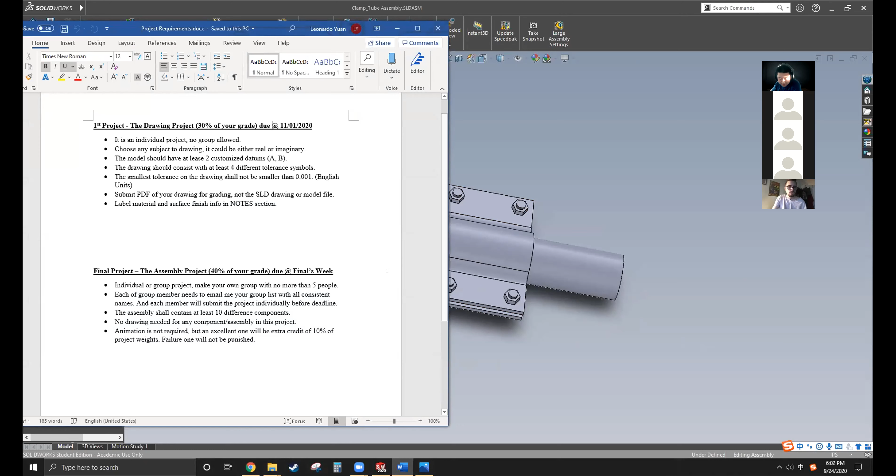So first of all, I want to talk about the projects, because we have 2 projects. The first one is a drawing project. You make a drawing of a part, save that drawing as a PDF and submit it to Blackboard. The second project is an assembly project, where you create a bunch of parts and assemble them into one assembly in SolidWorks and send me the assembly and the parts only. So no drawing is created in the second project.

The first project will be due November 1st. Is this due date okay with you guys? You have more than a month to complete it. Sounds good. Okay, because the first project should be a very easy one, because you just need to create one part, pick whatever part you like, but it has to be an actual part.

And I'm going to go over some advanced drawing techniques, for example customized datums and tolerance symbols, probably next week or the next 2 weeks. I'll make sure you know everything about how to make a drawing similar to industrial level, and I will let you know my expectations. Here is some briefing about the requirements. I'm going to post this in Blackboard after I read it to you and get your feedback, because I already asked Tuesday and Wednesday's class. If no modification is needed, I'll upload this right after class to Blackboard so everybody can see it in the course documents.

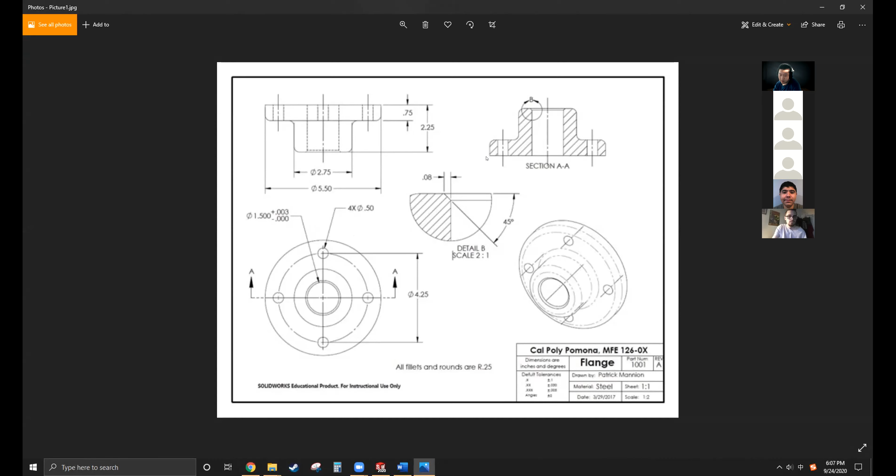Also, this drawing should have 4 different tolerance symbols, and we're gonna go over tolerance symbols next week or in 2 weeks as well. And I mean 4 different ones.

So pay attention. Somebody asked if they can choose a very simple part, a very simple configuration. It can be simple, for example a square, like a Rubik's cube or something, but that won't have enough detail to support 4 different tolerance symbols. Because a part must be complicated enough to support 4 different tolerance symbols. So this is gonna be a challenging one, and this is something I'm gonna pay attention to during grading.

And the smallest tolerance on the drawing is 1/1000th of an inch. Don't make it smaller than 1/1000, because this is, I'll say, industrial standard - we're not that precise, so 1/1000 is good enough. Don't make it 0.00005 or something like that.

All right, and English unit. So make sure I'm talking about inch as the English unit, because the standard for millimeter is 4 decimal places - that's 0.0001. All right, and the PDF.

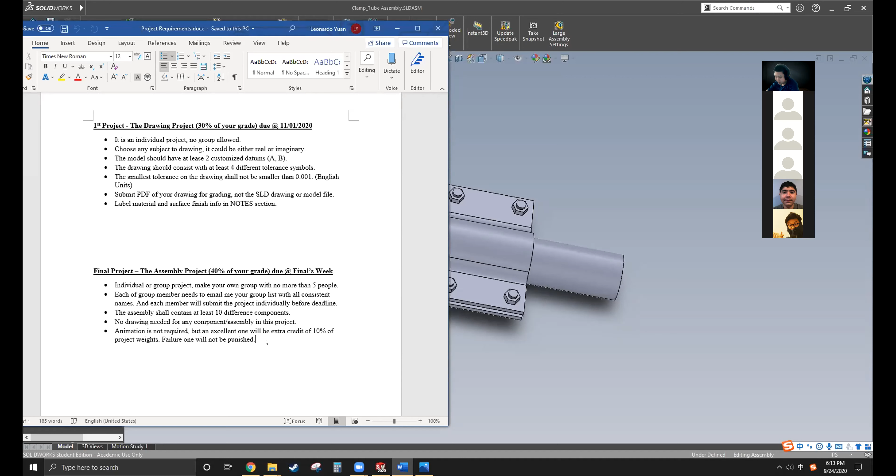For the rest of you who want the freedom to create something you like, you can do that, but you need to tell me by email what kind of stuff you're trying to make, and I'll say it's okay or not. I just need to know what you're making because I don't want something completely inappropriate. It can be an individual or group project, up to you, but I'm not here to make the groups.

Robotic arm, yes, I do allow that. If you can make, for example, a 6 degree of freedom robotic arm, that's great, because I made one myself a few years back when I was in school. So that's one idea that's approved. If you want to commit to it, go ahead.

For the assembly, can we make a movie like in the presentation? Yeah, I'm going to talk about that later. So group or individual, but I'm not going to help you make groups. It's up to you.

You've got friends, you can group up, but everybody in every group needs to send me an email containing the entire group name list, so I know each member acknowledges each other. I don't want somebody claiming to be in your group when nobody even knows that guy exists. I don't want any misunderstanding, so if you group up, everybody in your group sends me the name list, and it must be consistent.

Each group member - oh yeah, I just went through this. The assembly shall contain at least 10 different components. Everybody pay attention on this, this is probably the only very strict requirement for this project.

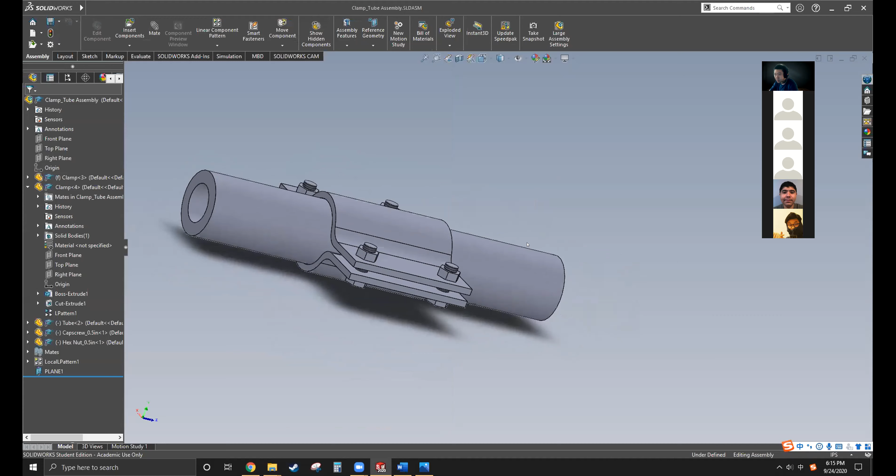Let's look at SolidWorks. This is a very simple assembly I made, 2 clamps clamping a tube. It's definitely going to be part of some huge assembly or something, but I just made this to show you guys an introduction to how to make an assembly.

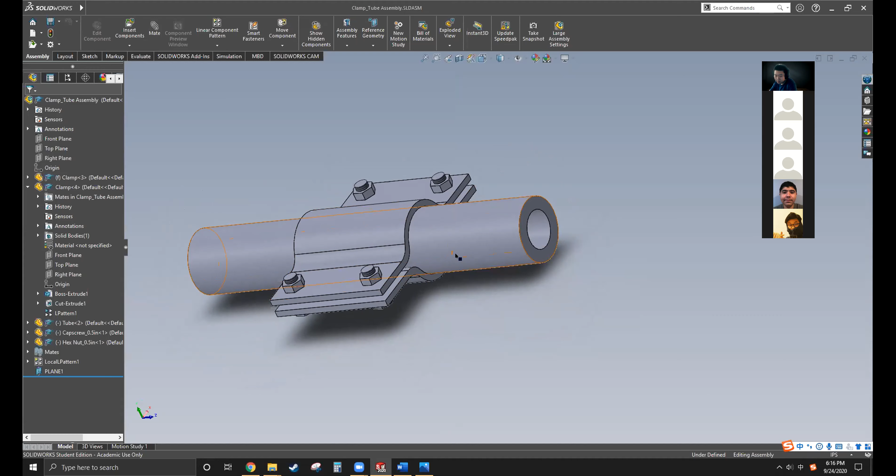So in this assembly, question 1: how many different components do you guys think this has? Type in chat, give me a number. Including the bolts and screws? Yeah, everything. Come on, give me a number. I see correct answers, and I see a lot of wrong answers.

Sorry, I asked this in a confusing way because I want the answer to clarify my requirement. The correct answer is 4, because I asked how many different components this assembly has. This assembly has 4 because the 2 clamps are duplicates, and the boltings are duplicates as well. The tube counts as 1. So: tube, clamp, hex nut, and cap screw - total 4 different components.

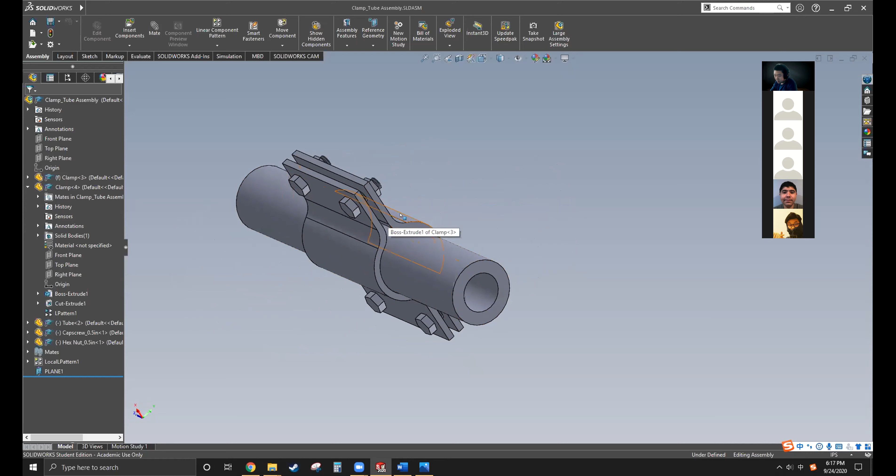Exactly, duplicates don't count as different components. The reason I'm saying that is when you're making a bill of materials or sub-assembly bill of materials for this assembly, you will only have 4 rows: 1 row for the tube, 1 row for the clamp, 1 row for the cap screw, and 1 row for the hex nut.

But the next question is, how many parts does this assembly have? Bingo, you got it, 11 parts. The fasteners are 8, and 2 clamps make it 10, and 1 more makes it 11. Why 15 though? The clamp is actually 1 piece.

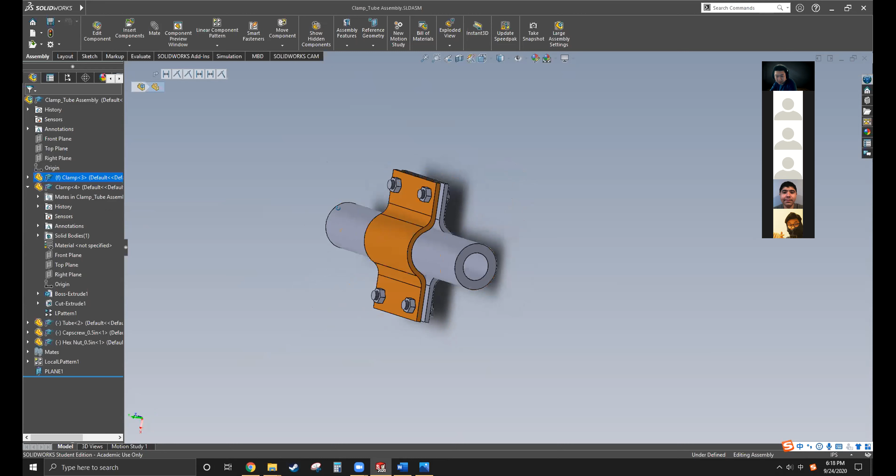Maybe you're confused with the clamp, which is one piece, and the tube is one piece as well. So 11 parts total, because the total quantity of parts is 11, but only 4 different components.

So let's get back to this list. I want your assembly to contain at least 10 different components. If you're not doing the engine assembly, this is something you need to watch. 10 different components, and fasteners don't count.

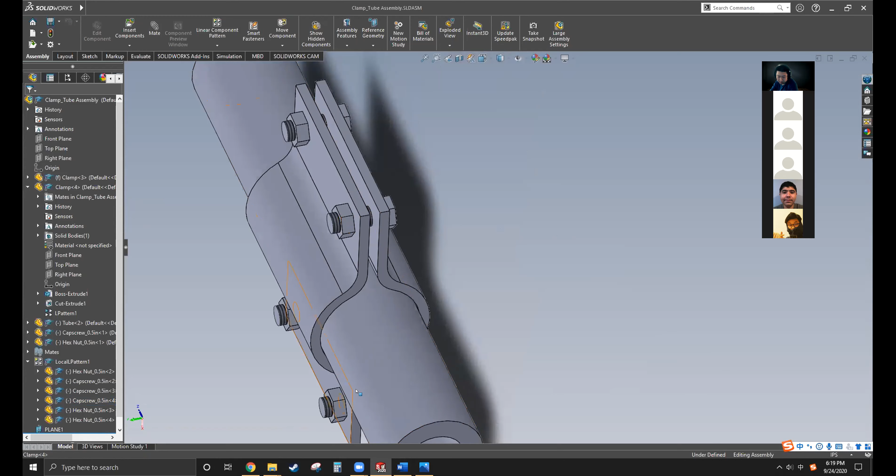So fasteners, like for example cap screws, no matter what size, only count as one. I understand some assemblies require different sizes or lengths of fasteners, but cap screws just count as one, and nuts count as one. So be careful when identifying your 10 different components.

And no drawing needed, so don't create drawings. Everything remains in the modeling section and assembly section. Don't create drawings.

For submission, save all the parts and assembly into a folder, zip that folder, and submit it to Blackboard. If Blackboard can take it, we'll do some experiments to see if it can take the entire folder and if I can successfully unzip it. If not, I'll give you guys an email address and you can email it to me.

Animation is not required, but if you can make a successful animation, I'll give you extra credit. If your animation doesn't work, I'll just ignore it, it won't hurt you. So any questions?

Oh, and it's due finals week. So when you're having your finals, it's going to be due that Friday.

Hello? Sounds good. Okay, no concern at all? No, makes sense, okay, that's good. Yeah, you guys are really good. All right, then I will save this and post it into Blackboard after the lecture.

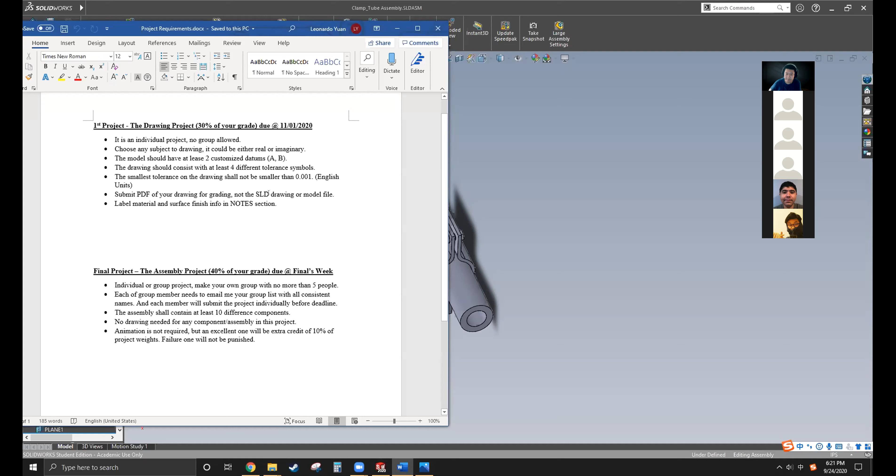Anything else? I believe you guys have all seen this. This is what I downloaded from the PowerPoint. You want to use this as a reference for basic drawing, go ahead. But the detail of this one is far from enough for project one, so just remember that. The title blocks are good though.

Okay, let's get into today's topic. So today is actually the third time we're meeting for SolidWorks, right? The first time I showed you guys how to model easy things. Second time I showed you guys how to draw easy things. And today we're going to assemble easy things.

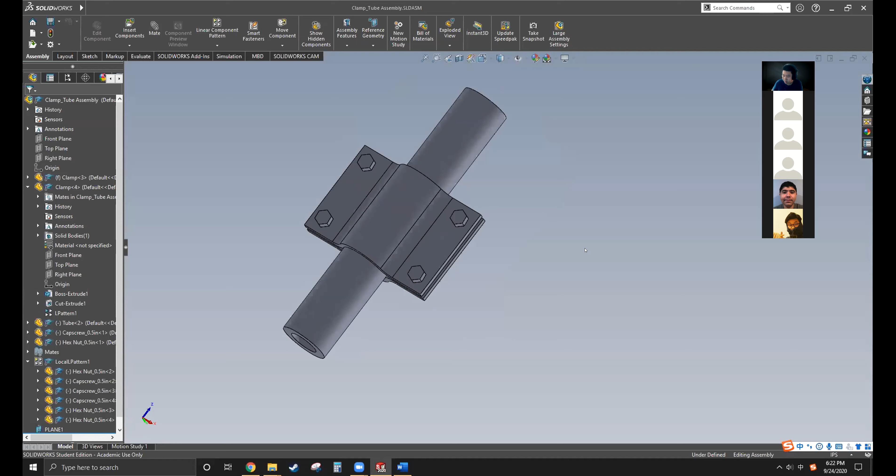So today I'm going to show you guys how to make this assembly. Is this assembly at least familiar to you? So at least you know what this assembly is. Any question about this assembly, or anybody doesn't even know what it is?

Is this going to be on the test? No, no, I just want, for example when I'm talking about the clamp, I want you guys to know what I'm talking about. Yeah, yeah, so.

Okay, let's start. No? So this class won't have any exam.

We only have quizzes, and 4 quizzes are only 10% of your grade. The first quiz is probably going to be next week. I'm still thinking about what to put on the quiz, because I feel like SolidWorks is, we don't have a textbook to base it on, and there's pretty much no concept. It's just like, I show you guys how to do this, and I don't know how to actually quiz it. So I'm still thinking about it.

Maybe I'll just merge the quiz into assignments. So give me a week, and I'll let you guys know next week. Either you guys are going to have the first quiz, or I cancel the quiz section completely and make the assignments 30% of your grade. Because I'm thinking about multiple choice questions, and all my potential questions feel so dumb.

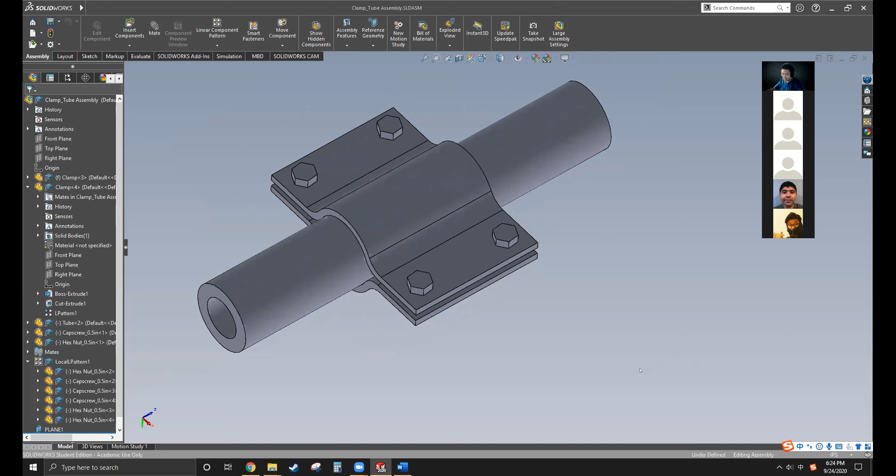All right, so let's get into this, and I hope we can finish quick. Before you make an assembly, definitely you're going to have a lot of parts, right? So part, assembly, drawing - assembly is when you have all the parts ready and you try to assemble them together. So let's start making the part.

Oh wow, my computer is lagging. What the hell?

Alrighty, so in order to design the clamp,

Yeah, it does. That's why I'm thinking about upgrading my computer to 32 gig. Just lazy to do it.

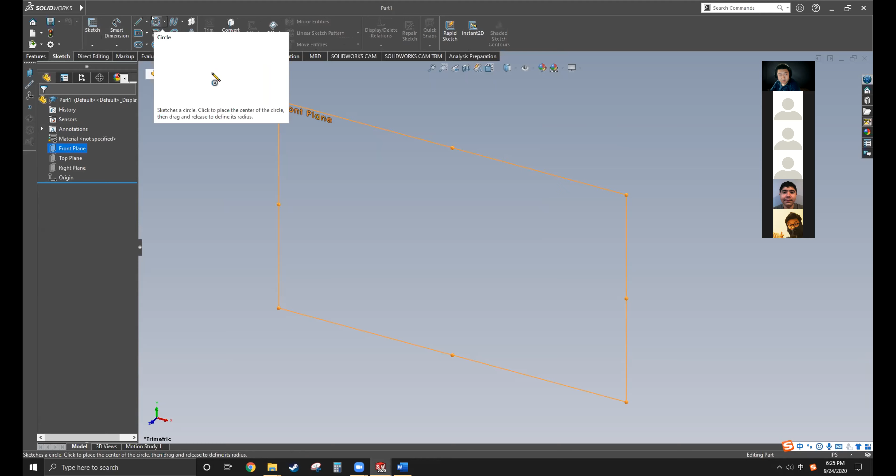So at the very beginning, let's make that clamp. In order to make the clamp, you need to know how a clamp works, right? A clamp has two pieces to hold a tube or hold a pipe. So let's start by drawing center lines, because it's a symmetric part. A clamp is a symmetric shape; the left side is the same as the right side. So let's make a cross first, and let's make a circle.

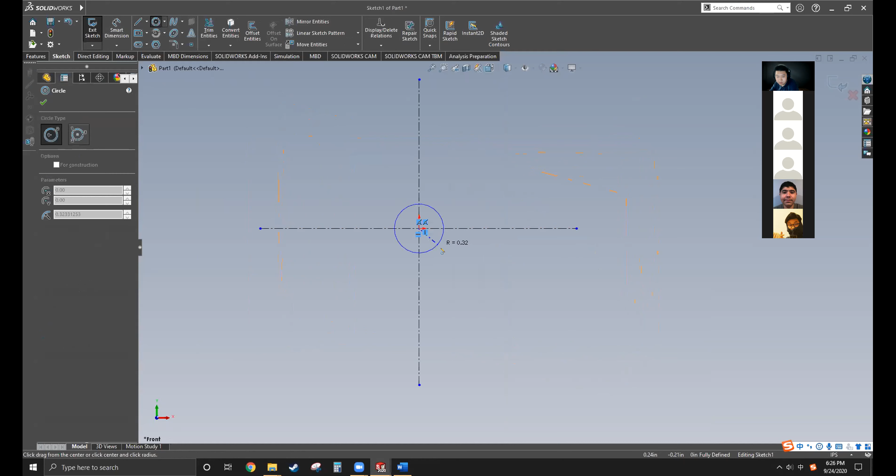This circle represents the outer diameter of the tube. The radius, let's do 1.25, so we have a diameter of 2.5. So we dimension it, 2.5 diameter. Everybody good with this? This is going to be the outside diameter of the tube that the clamp is holding. So the clamp's inside diameter should be equal to or larger than this 2.5. If it's smaller, then it can't fit, right?

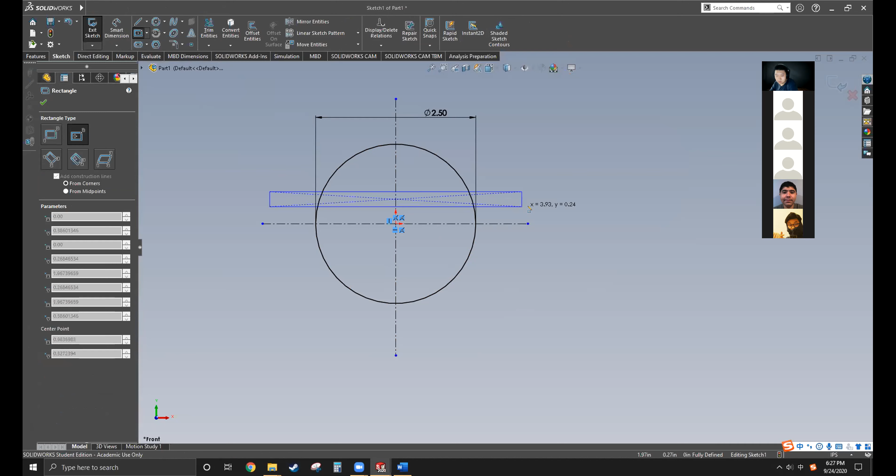So we have the outer diameter of the tube, and now let's make the body of the clamp. The clamp works in pairs. One clamp can't work. We're going to have two clamps, and the two clamps should have some space in between, because if the two clamps are touching each other, this surface and this surface, there is a chance the tube or piping will slip. We want to apply the maximum friction we can get from the compression of the bolting. So when you're creating the body, you need to take that into consideration. The body, like the wings of the clamp, should have some distance from the center line.

If I draw the other side, the two clamp bodies should be somehow like this. The top rectangle is going to be the first clamp body, and the second rectangle should be the bottom clamp body. But we only need to draw one clamp because we can use it in duplicates, right? So let's get rid of the second rectangle. This is going to be your clamp body, and let's put dimensions on it.

First, how thick do you want your clamp body to be? I'll say 1/2 inch. And what is the total length of the clamp? Let's do 7. And how far apart do you want the two clamps to be? It seems like a quarter should be fine.

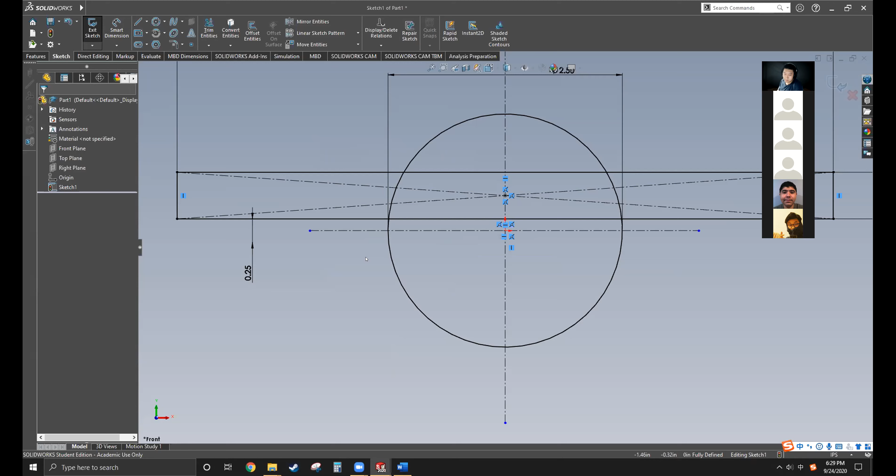These numbers are totally made up. Whether this clamp fails must be known through stress analysis by FEA or some other method. In this design, it's kind of like trial and error. Basically, you're designing based on your experience or somebody else's experience. These numbers are made up and don't guarantee this clamp works, so pay attention to that. Don't say, okay, I got these numbers by calculation. No, I didn't. It just looked okay to me. If you want to test the reliability of this clamp, you need to FEA it.

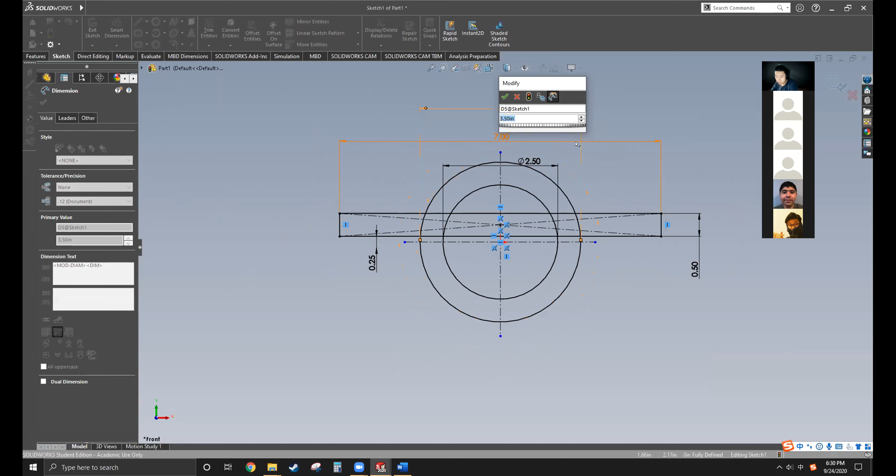So let's do another circle because the clamp needs an outside diameter as well. This arc is going to be the inside diameter of the clamp, which is holding the tube. And this one also needs a thickness, so let's keep the thickness consistent at 0.5. So 2.5 as the inner diameter and 0.5 as the thickness gives us 3.5 as the outside diameter. So 3.5 as diameter.

So you can see right here, the clamp shape is here, like the half moon or omega shape. It starts from here, the arc, and it ends here. Now let's get rid of the lines that are irrelevant. So trim, and there's a power trim, and just drag it to get rid of the lines.

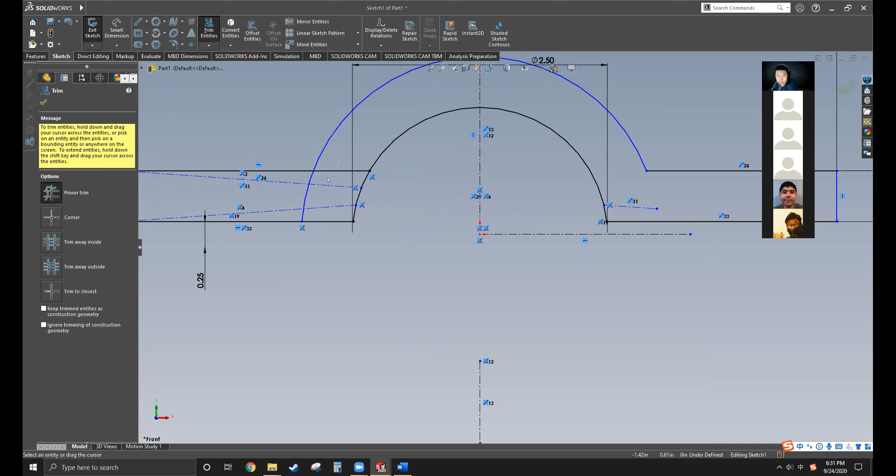Alrighty, so now it looks like a clamp, right? Fairly similar. Now let's make some minor modifications. We need to get rid of the sharp edge and make the tension transition a little bit smoother. So sketch fillet, in sketching right here. You can have a fillet in the sketch section, not the feature one. The features also have a fillet, but not that one. The one in sketch is called sketch fillet.

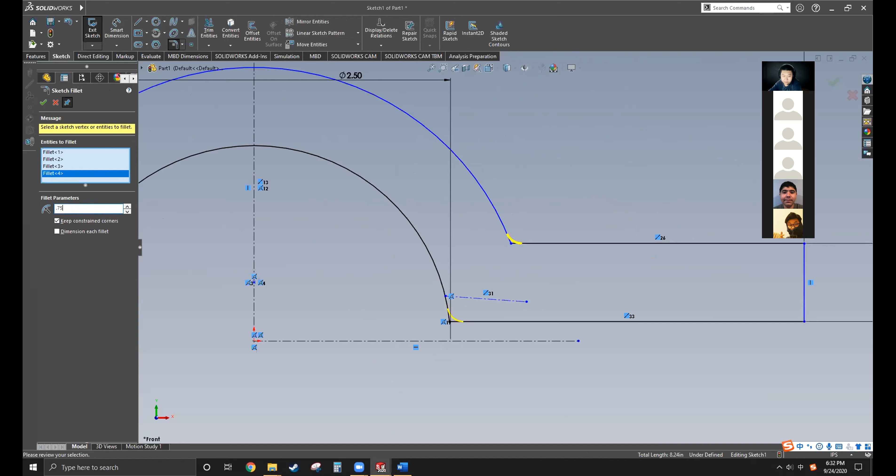So you just click the first line and click the second line, and there's going to be a fillet in between. Let's set the magnitude as 0.75, and look at the preview for how smooth it should be. It looks pretty good. Or you can change it to 0.5; it's smaller, but it also looks good. Let's keep it 0.75. You see it's way smoother. And the trim is in the sketch section right here, called trim entities.

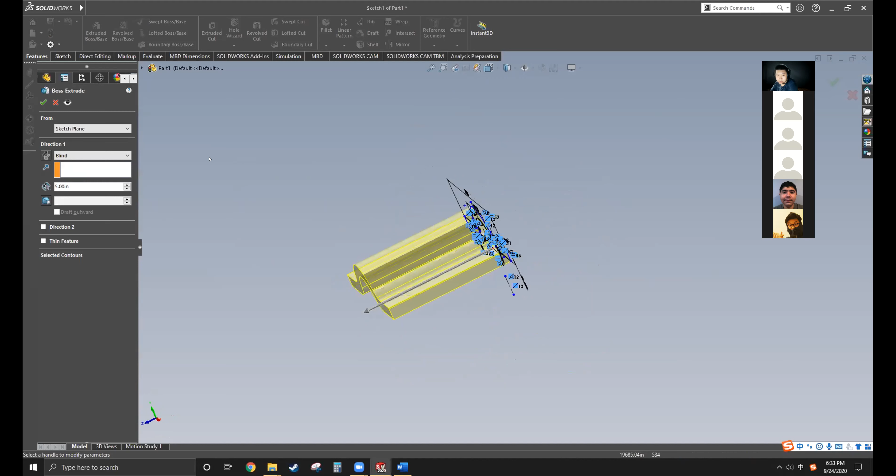All right, so once you complete it, you can go to feature and extrude it. Let's make the total length as 5. So the front preview, you'll have a total length as 5 and a total width of 7. Okay. You click OK, and the clamp body is made. And what's missing now is holes, right?

So you can go here, insert. Professor? Uh-huh. Was the extrude 7 or 5 inches? Wait, is the what? Sorry, I didn't catch how many inches you extruded the sketch. 5, but it doesn't matter. You can just pick arbitrary ones because I did arbitrary. Okay. These numbers are all I made up. I didn't use any reference.

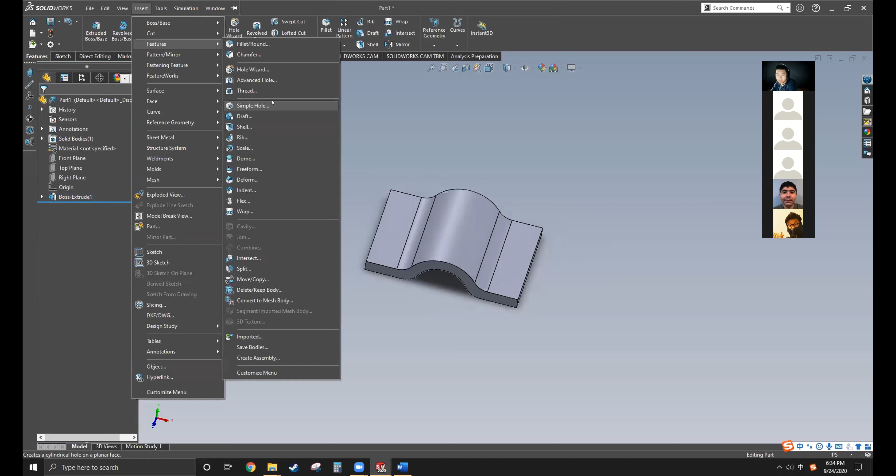So you can go insert, feature, there's simple hole. There are a whole bunch of other holes, but in this class, the simple hole should be fine. Let's stick with simple hole today, or you can search here. Let's say hole, and you'll see a whole bunch of holes right here. Let's do simple hole, and it asks you to select a surface where you want to place this hole. So definitely this one. And look, it has one direction. Blind, through, next surface, or other stuff.

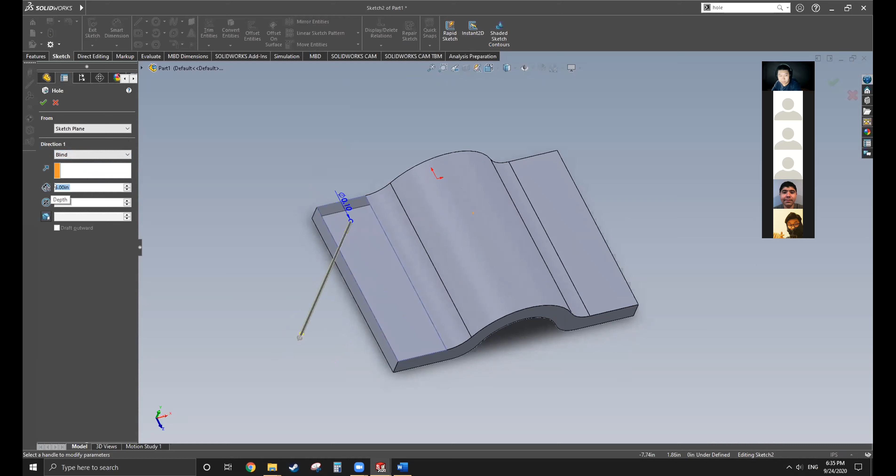We can do next surface and select a surface, or we can do through, because we're gonna do a through hole, right? And this one is asking what is the hole diameter. If you're selecting blind, they're gonna ask for how deep this hole should be. So let's do through so we don't have to punch in another parameter. The hole diameter, 0.5 should do the job, and it's not gonna leave too little material to the edge. So that worked for me.

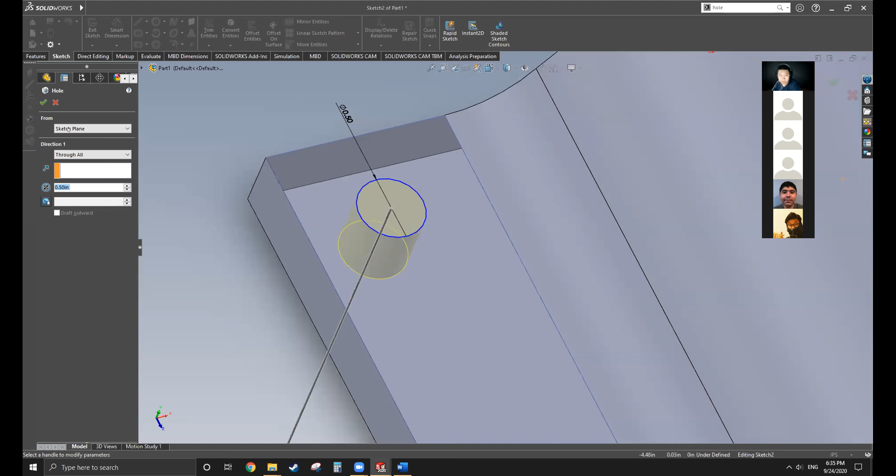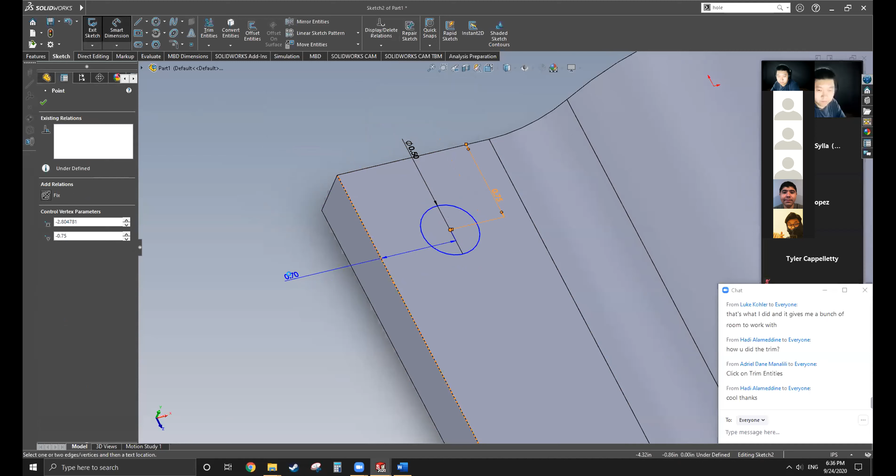So one hole is made, but this hole's location is random because we just clicked some random place. So you must go under the hole. There's a sketch, and you need to edit the sketch. Going to sketch, there's smart dimension, so you can identify the location of this hole from the origin to the edge, or if you have other reference. Oh, okay, sorry. I need to do this first. Let's do 3/4. And 3/4 as well. So now you can see this hole goes from blue lines to black lines. That means this hole's location is defined.

Exit the sketch, and now you see this hole is at one of the corners. And how to make the rest of 3, you can go exactly through what we just did and make 4 different hole features, or you can go linear pattern. If you do pattern here, you see you have a bunch of different patterns. Here's the thing. You can do the negative extrusion and make a hole, but the feature you're gonna have is an extrusion cut. So it's not gonna be a hole. That's why there are so many different hole features right here: simple hole, hole wizard, advanced hole, and so on, because of the callouts.

For some models, for example, some very precise assembly, they want to call out the hole and have the model consistent with the hole you just created. That's why you need to use these features. For this class, we're trying to keep things simple. That's why we use simple hole. In this class, if you want to use extrusion cut to represent a hole, go ahead, because we're not going to machine anything. But later on, you'll find out sometimes you only have the choice to use certain hole features, because when you're making the drawing, you won't have very exact and precise callouts.

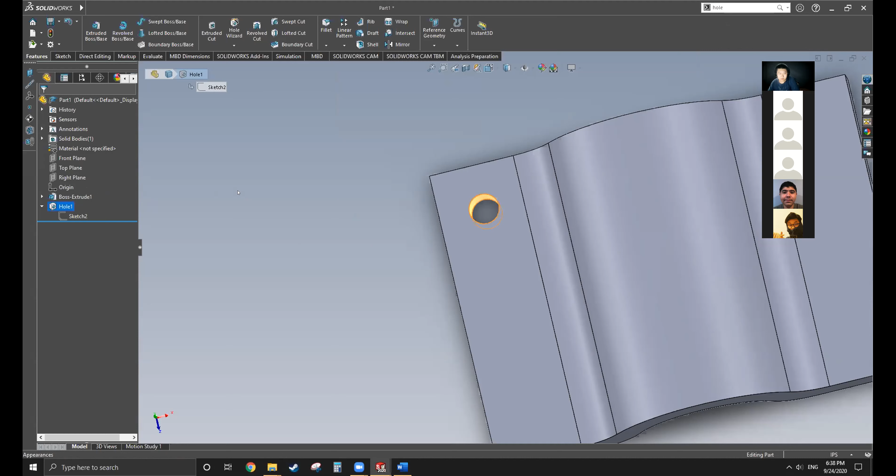Okay, so let's do linear pattern, because it goes linearly, right? We want 1, 2, 3, 4 holes. Click linear pattern, we already selected hole 1. So this box shows hole 1 here. If you didn't select any feature, you need to manually select the hole in here. First it asks for direction 1. We want this hole to have another sibling at this side of the wing, right? So let's choose this edge, because this edge goes from left to right, kind of like west to east. That's our first direction, and you will see a little arrow pointing rightward. That's the correct direction we desired.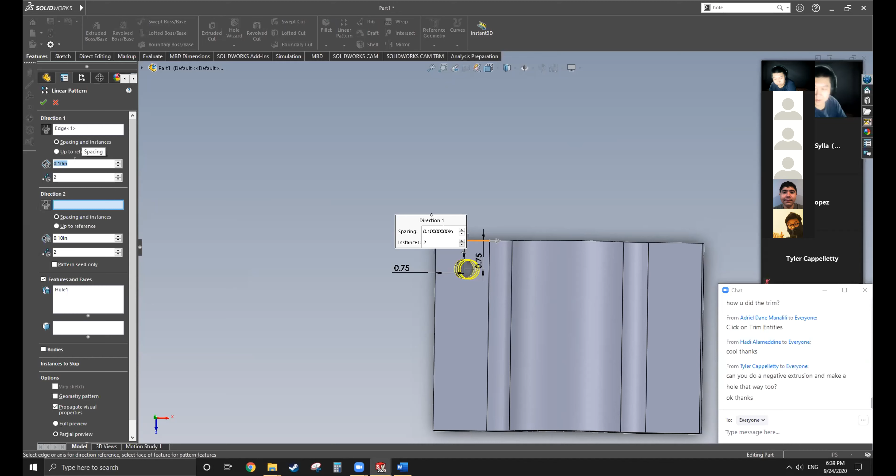And this is distance, like spacing, how much apart you want this hole to be. The total length, if you don't remember, you can measure it from the Evaluate tab. There's a measure, so measure this edge to this edge. It will tell you distance is 7. So 7 minus 0.75 and minus another 0.75, because we want this hole to be the exact distance from the edge, same as this one. So 7 minus 3/4 minus another 3/4, that's 5.5, right? And you can see the preview lands exactly where we want.

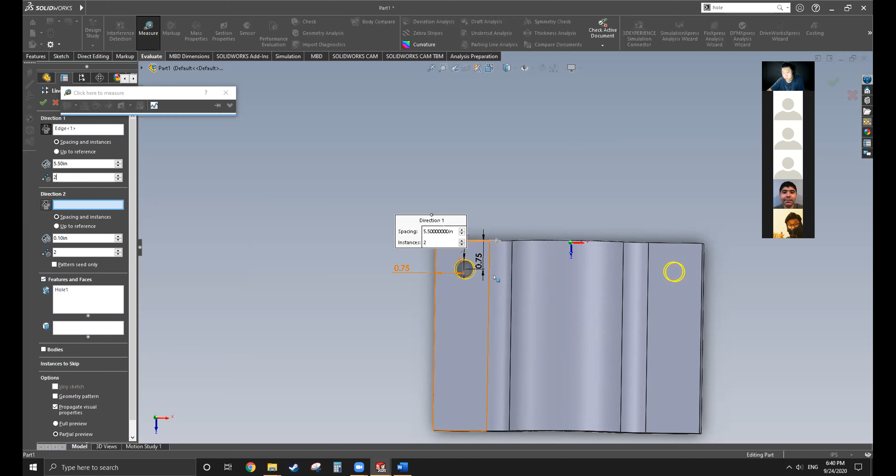So number of instances, that means how many holes you want to create in total. In total, we want 2 holes, that's why it's 2. And this one can be 1, because if you choose 1, there's not going to be any creation here. Your original hole is counted as 1.

So direction 2, we want it to be downward, north-south, right? So choose this edge and look at this arrow here. It's pointing upward. That's not good. We want this hole to be downward, right? This little arrow here. So here is reverse direction, and it's pointing downward now. You reverse it back, it's upward, and click one more time, it's downward again.

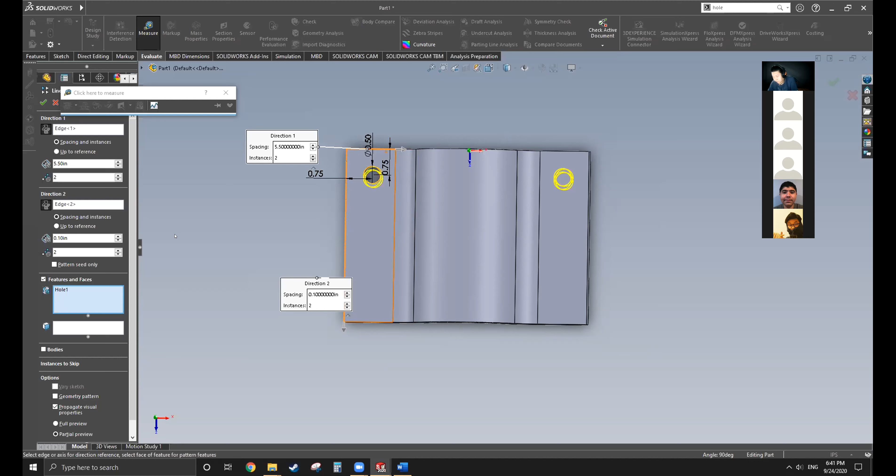So how much spacing? I remember the total length of this clamp is 5, right? So 5 minus 3/4 minus another 3/4, because the origin to the edge is 3/4, right? So 5 minus 3/4 minus another 3/4, that's 3.5. And number of instances, 2. And it also creates one right here because this and this are linked together. So this one is automatically created. So look at the preview, everything's good.

And if you're interested, you can play around with some options right here. And now we complete. All right, so you click on this pattern, you see 1 pink, 3 yellow. The 3 yellow are the generated features, and the pink is the original feature.

Give me 1 second, let me turn on a light.

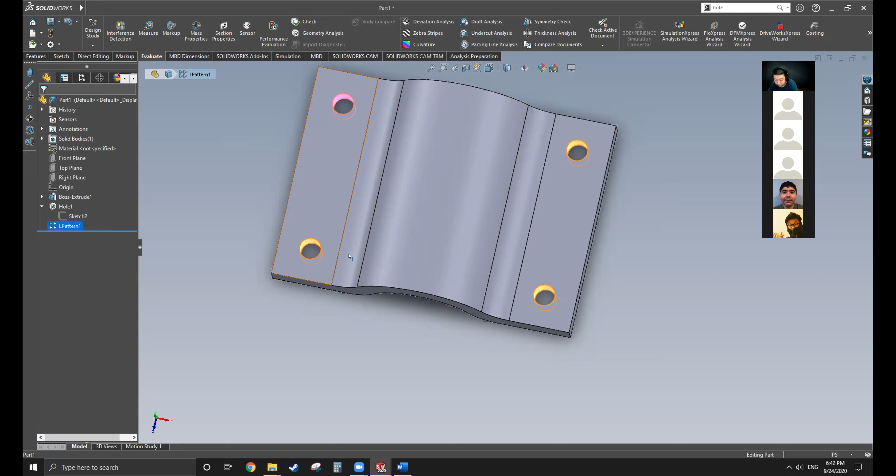Okay, any questions? Because the clamp is completely made at this point, so this part is complete. All right, no questions? I'm gonna move forward. So let me close this. So next, the tube, I'm not gonna make it. The tube is just 2 concentric circles extruded, so that's one very simple part.

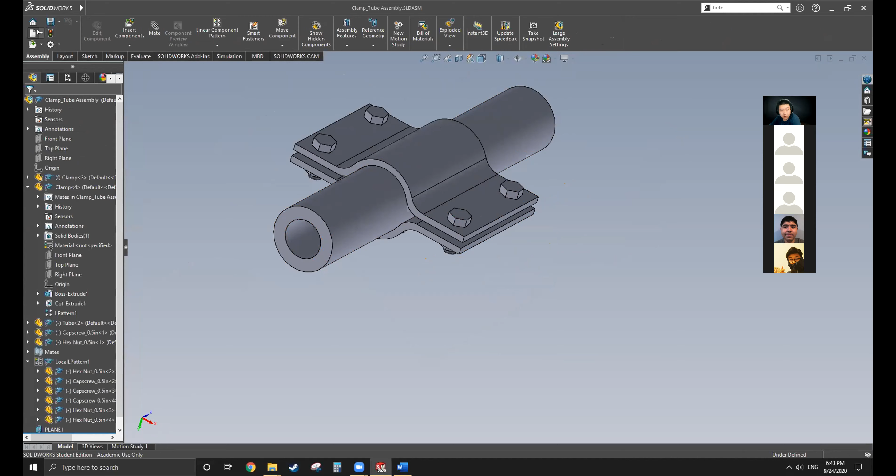So let's make cap screws. Actually, cap screws you don't have to make, because from yesterday's class, somebody really good at SolidWorks stated that SolidWorks has a built-in database, and all standard fasteners are included. I don't know how to access that because I don't use SolidWorks. But all the standard fasteners with standard size and standard grade, you can just obtain the model straight from SolidWorks.

Okay, change the length of an extrude. Which extrude are you talking about?

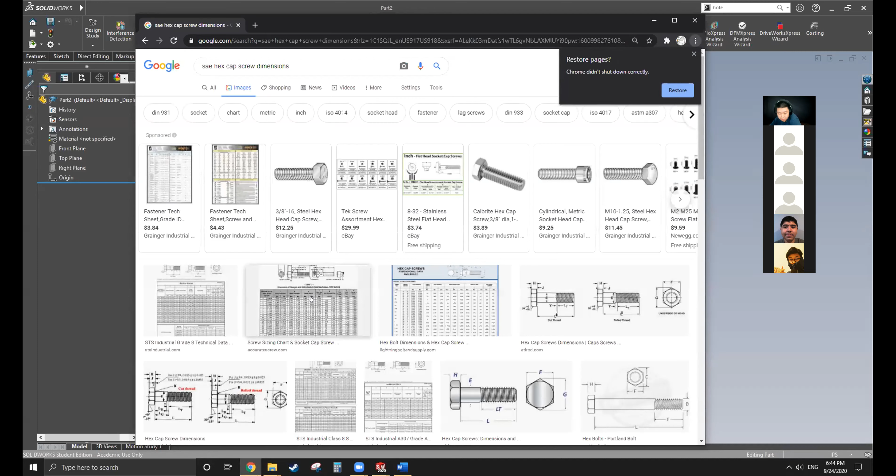So before we get into how to model cap screws, normally the SAE standard cap screws are what I use in daily work, and it has its own dimensions. Is this one? Or is this one? Yeah. Okay, so this is SAE grade 8, the one with the most strength. From here, you can see all the dimensions are defined by the list right here. In this case, we're using a 1/2 inch nominal size cap screw. So from here, it says 1/2. So pretty much this line is what we're gonna use in our case.

And also, don't worry about making fasteners, because commonly, if you're working, your company will have all the fasteners standardized, by either SAE or some ASTM, something like that. I'm not an expert on fasteners, but at my company, we don't make the fastener models. We just grab them from the library. So today I'm gonna do a very simple model for this cap screw because I want to show you guys how to make the cosmetic thread. But just remember that you should always download the SolidWorks or CAD model online for standard fasteners. For example, McMaster-Carr, they do have models you can download.

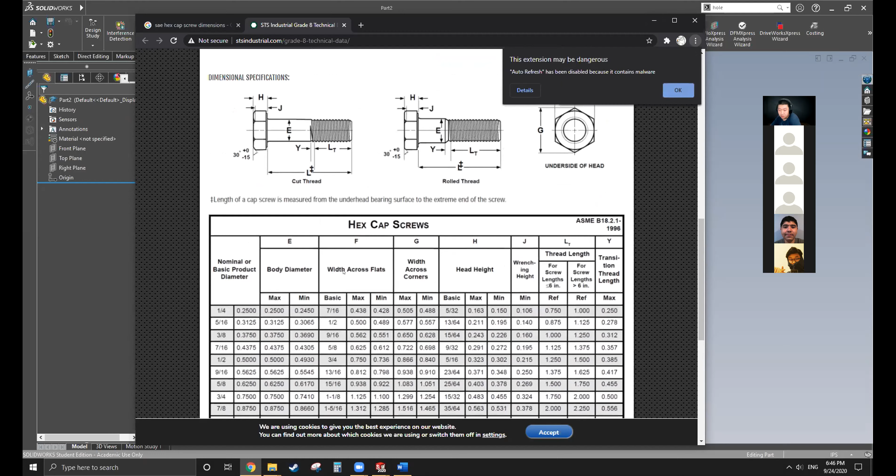Or if you don't want to download and just want to do simple modeling like I'm doing in this case, just follow me. So let's look at some significant dimensions. This line is what we're gonna pay attention to. The H is a critical dimension, and F, G, LT, and total length can vary, because you can have the cap screw at multiple lengths. So let's see, F is 3/4, G is 0.8, LT is 1.25, and H is 5/16. So let's start sketching. So polygon, that's gonna give you the cap screw's cap.

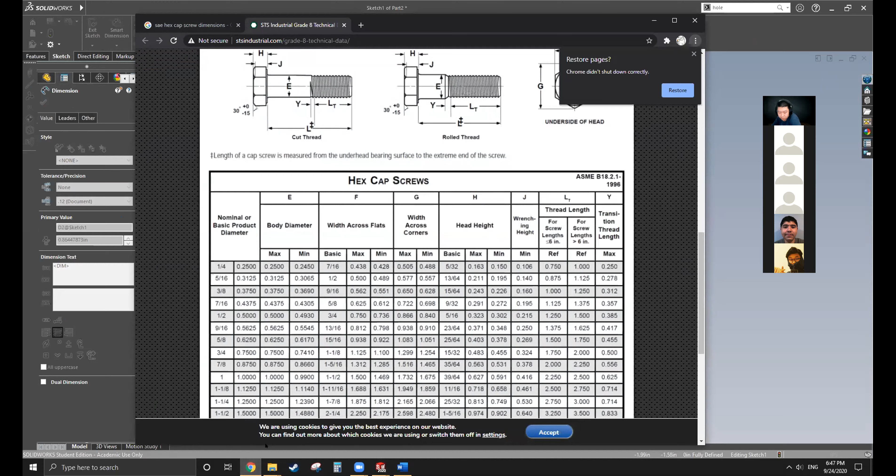What was that again? 0.866. All right, fully defined. And let's extrude it. And this one is 5/16. All right.

Okay, so we finished the top part of the screw, and let's do the body. Select the surface and draw a circle. And we know the nominal size of this screw should be 0.5, so the radius should be 0.25. I extrude it.

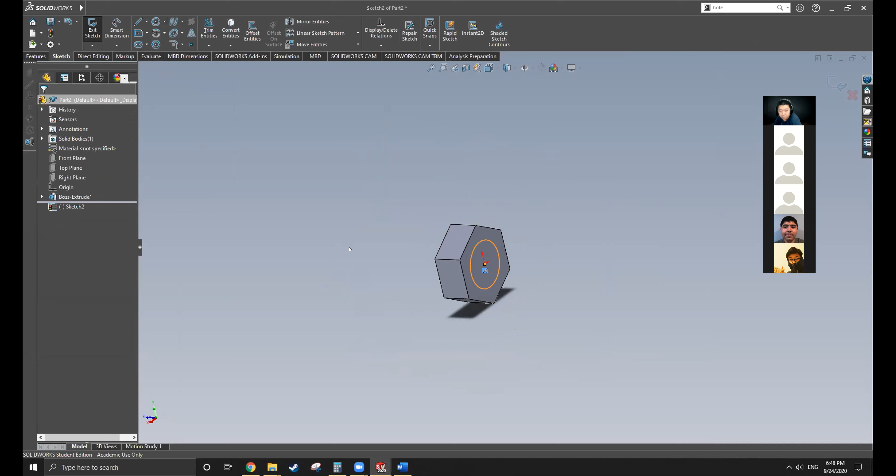And the total length, let's make it, I'll say 1.75, because we want to make this long enough so it can extrude out the hex nut for at least another quarter, because normally we want to leave at least a quarter clearance. All right, so this is the cap screw we just created.

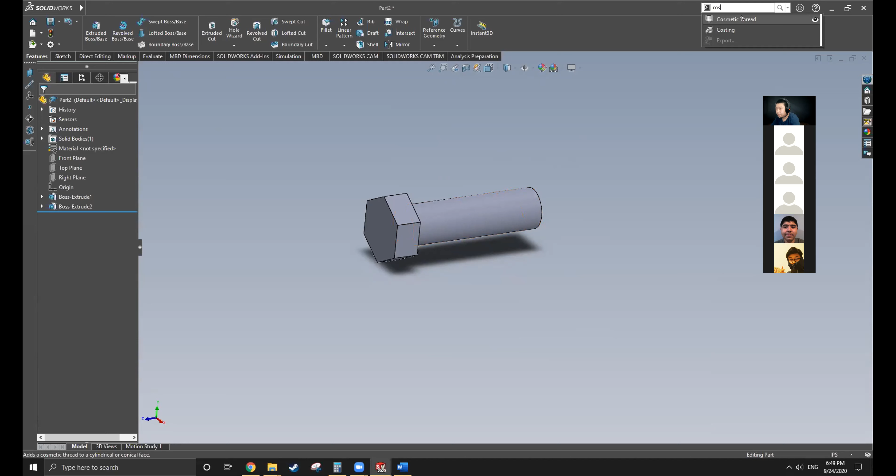So we're not going to have any physical thread, because physical thread is another feature and a very complicated one. You need to use helical sweep, and if you have a lot of fasteners in your assembly, and every screw and nut has physical thread, your model is gonna take forever to load. So people actually just use cosmetic thread. So cosmetic is kind of like, you know, makeup, right?

So you can search cosmetic right here. The first one is cosmetic thread, or you can go, I believe, either insert or tool, somewhere. Yeah, good luck finding it there. But I'm pretty sure it's either in insert or tool.

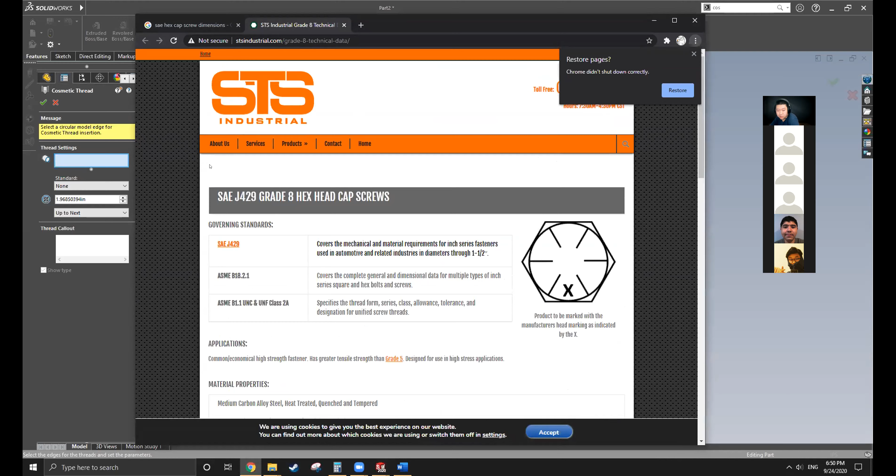So the first question they ask is, they want a circular edge for this cosmetic thread. The size of the cap is what I researched online for the SAE grade 8 hex cap screws. And you know, different standards will have different dimensions. And right here, the F is 3/4 and G is 0.866. All right. So the first question asks for a circular edge, definitely right here. This is where we want the thread to begin, right?

And standard, you can see NC standard, ISO standard, a bunch of other standards I never heard of. And this time we use none, because I don't know which standard this one should be. And there are blind, up to next, or through, stuff like that. If you say through, you will later have the entire body threaded. But normally cap screws are not like that. From here you can see cap screw.

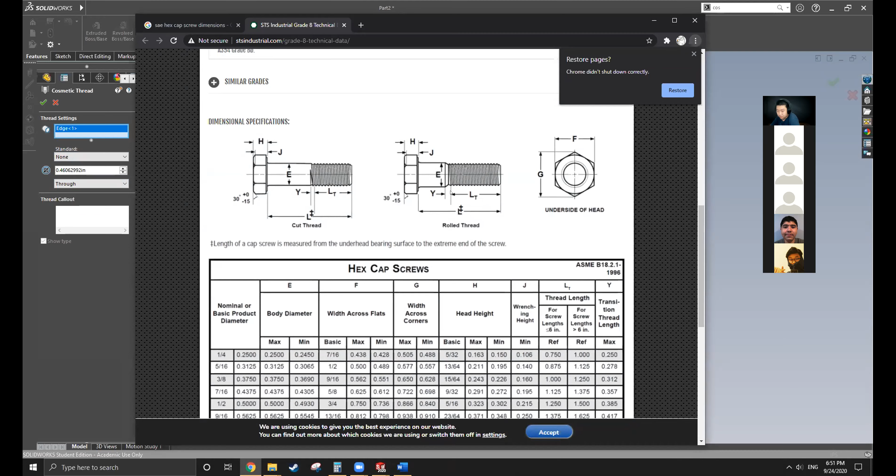The thread length is fixed. For 1/2 inch it is 1.25. So we need to choose blind because we only want the thread length to be 1.25. All right, and let's get this to be 0.49, as big as possible.

You can see thread callouts, right? So this is what I'm talking about when you're making holes. The hole will have its own callout as well. And this callout is what's gonna show on your drawing. And definitely you can fake the callout by typing a note, but the best practice is to make the correct callout and use it in the drawing.

So there is more than one way to do a drawing, right? Since we're not making a drawing, thread callout, I don't care. So I checked it, 1.75. And you see, nothing showed up except we created a ring. And this ring is saying, oh, it's a cosmetic thread. Does it look good? It doesn't, right? We're missing the major component that we want.

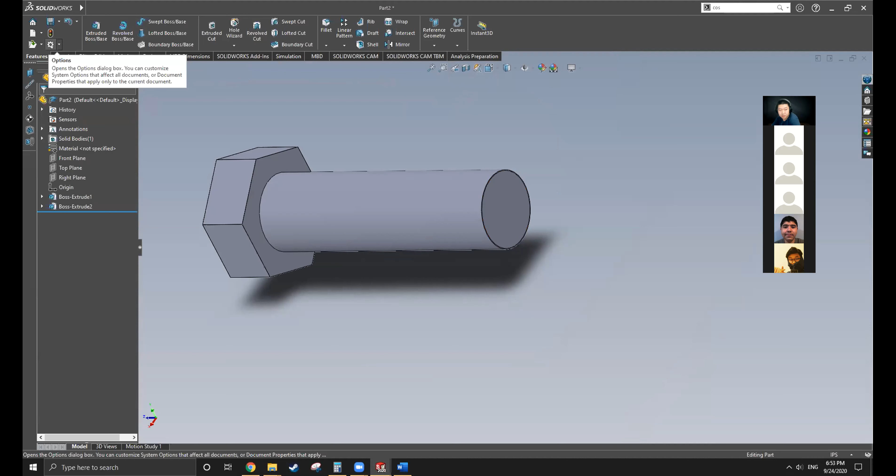So why is that? So let's go to our settings. Here's options, right? Going to options, and here, let's search cosmetic. So you can see there are different cosmetic settings, and let's click one by one to see what went wrong. So this one, allow cosmetic thread for upgrade. Okay, it's checked. Here, cosmetic threads is checked. Cosmetic display, yeah, it won't show. And shaded cosmetic thread is unchecked.

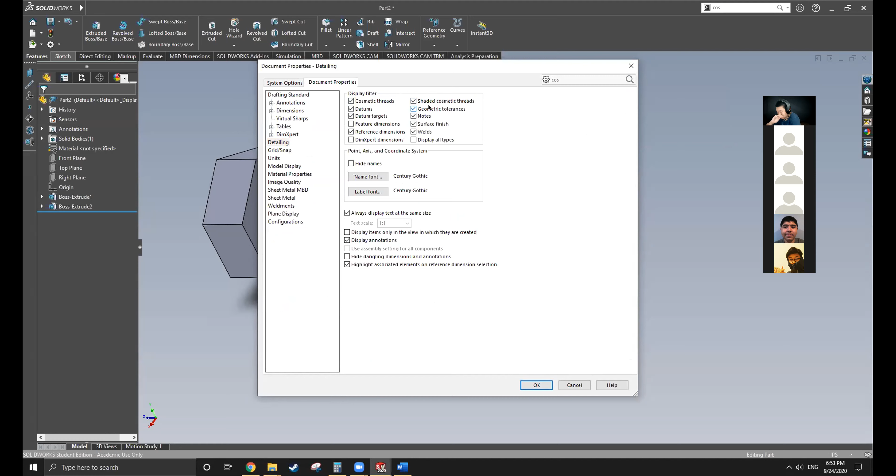So let's check this to see what happens. So I check the shaded cosmetic threads. I click OK. Here we go. Looks pretty decent, right? Kind of just like a real cap screw. All right. Any questions so far?

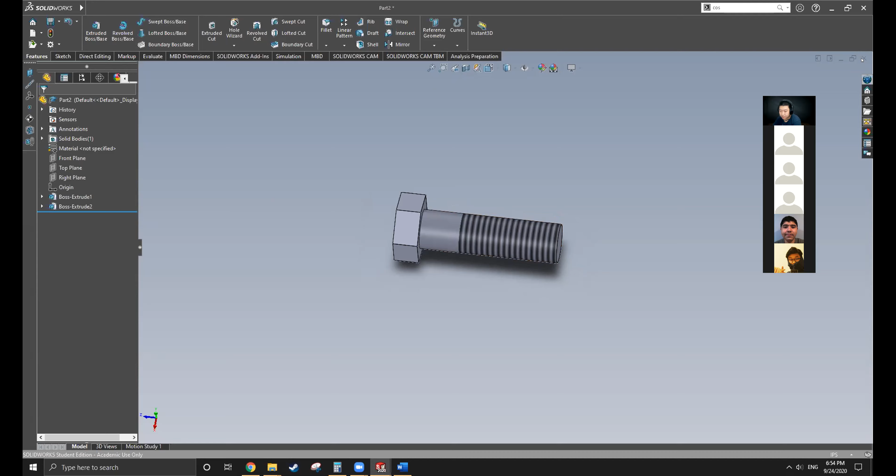Alrighty. So make the nut the same way, or download the nut from some website, or just figure out where the built-in database is in SolidWorks and use the SolidWorks standard fasteners. I don't know where that is. I'll figure it out if I need to. So let's close this. Let's try to assemble the whole thing. So let me open them up individually.

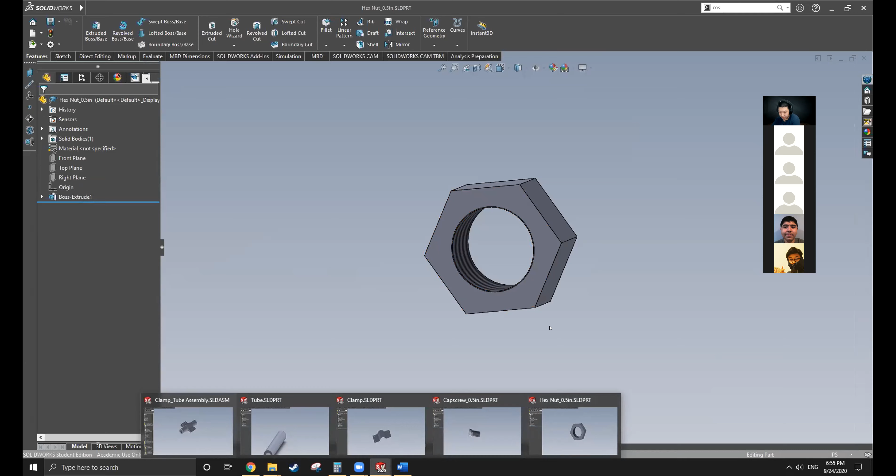All right, pay attention. This assembly has different dimensions than what I just created in front of you guys, because this assembly was created last weekend. So, you know, when going through classes, I can't remember which dimension is exactly the same. So I will let you guys know ahead, this dimension is different than what I just created. All right.

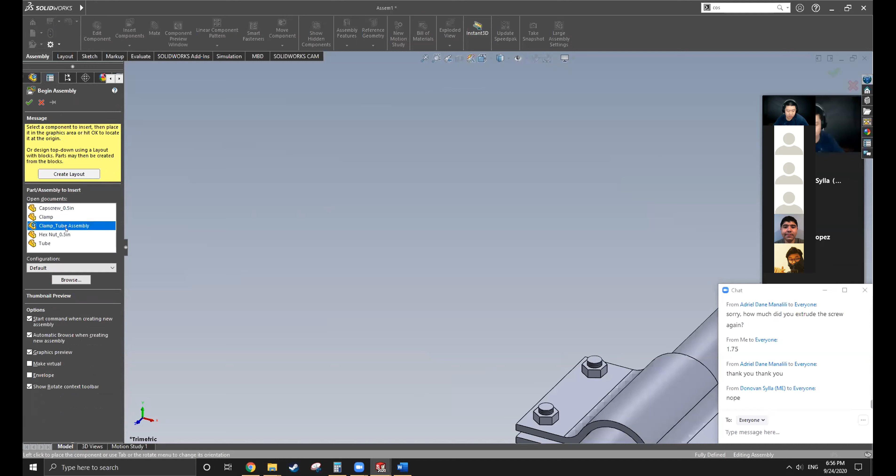So new, right? So let's move this one to assembly. Okay. So now you see the reason why I open up individual parts, so I don't have to browse, because yesterday I had to browse every single part from the entire parts list. So let's get rid of this one. So now we have all 4 components in this section. This is what I'm talking about, why we only have 4 components.

So you select one of them and just click in the middle of the screen. It's gonna automatically show up, and click again, you place it here. So you have one part you selected, placed in here. And let's insert components under the assembly tab, insert components. And this list shows up again, and let's insert another clamp. There's 2 clamps, right?

So you need to have a very clear idea how to install this. So pretty much, first of all, 2 clamps should be connected by the fasteners, right? So this surface is corresponding to this surface, and this surface corresponding to that surface, and the top surface should be kept at the same level, and the side should be kept at the same level.

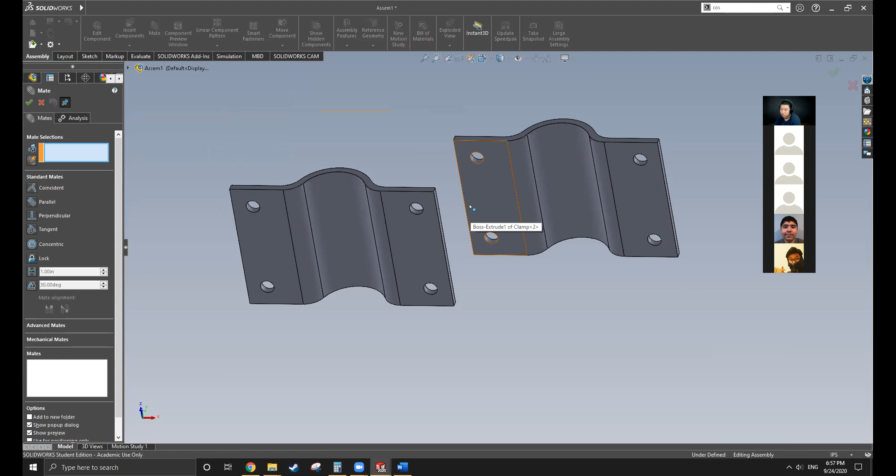So let's go to mate. Same assemblies tab, and right next to insert component, there's a mate. So mate asks you to select 2 surfaces or 2 features to mate each other. So let's select this one and this one. And here's coincident, parallel, perpendicular, tangent, concentric, and this is distance, and this is angle.

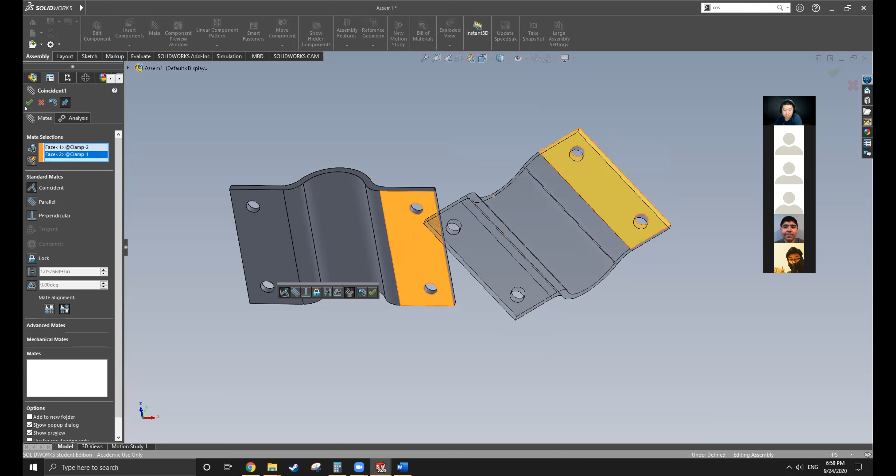And here, mate alignment, that means direction. I don't know why they call it alignment. In Creo, I just call it direction. And let's flip this, because the clamps are facing each other, right? So everything is fine. You can play with those advanced mates or whatever, but it's not helping in this case. So you click OK, and another mate relationship shows up, and this one is what you just created.

So let's do the second pair of mating. So the top and the top, and coincident is already selected for you. That's good. And the third one is the side, right? This side and this side. And now you can see this clamp is completely connected with each other.

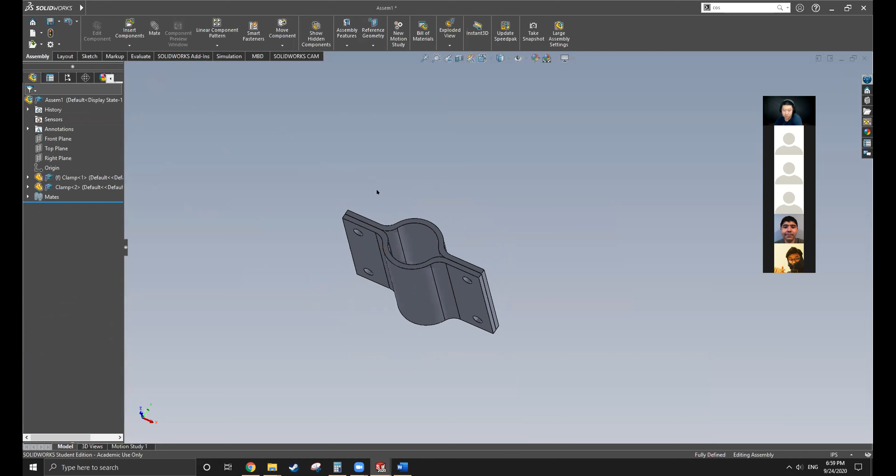But something's wrong, right? We quit mating, and you can find all the mate relationships right here. So the first one is the inner surface, and the second one is the top surface, and the third one is the side. And the colors represent different parts, orange and purple, right? You see?

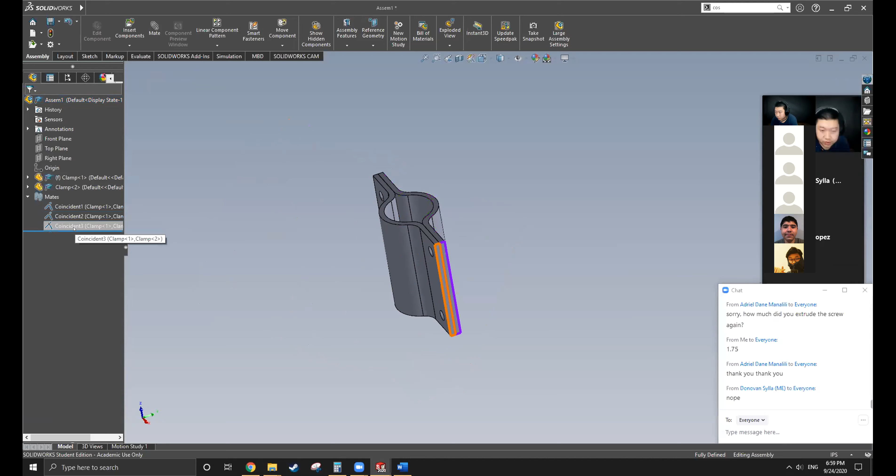So this is something I'd say is wrong, because we want the two clamps to be apart, not sticking with each other. So what we do, we come to here and figure out which of the mating relations we need to change. Apparently the first one, right? We don't want them touching each other. So click on that, and there's edit feature, and you go back to that interface to change the property of this mating relationship. So instead of coincident, let's do distance.

And let's do 0.2, because that was my initial setting. In the new one, like the one you created following me, you should put 0.25, okay? So 0.2, you see this is much better. The two clamps are separated and waiting for fasteners to connect each other. And we can quit mating.

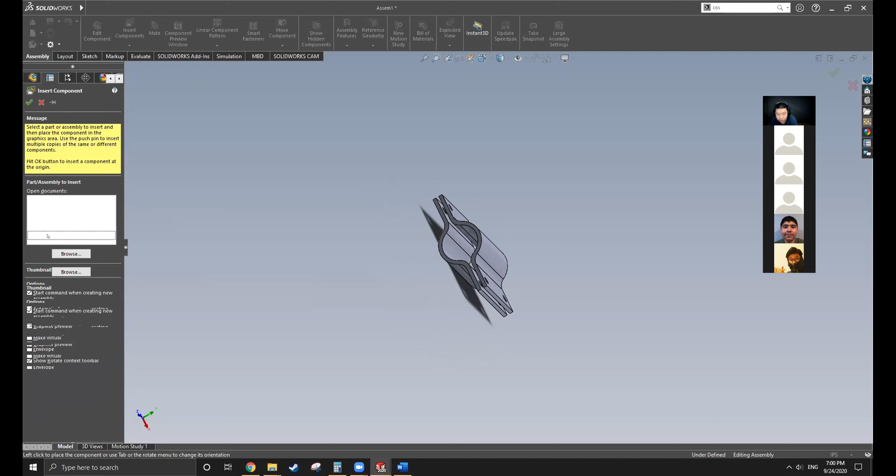And let's insert another component. So this time I want to do the tube. So drop it right next to the clamp or wherever you want and start mating. And take the outside surface of the tube and the inside surface of the clamp, and make them concentric, right? And if you don't want to make them concentric, right here,

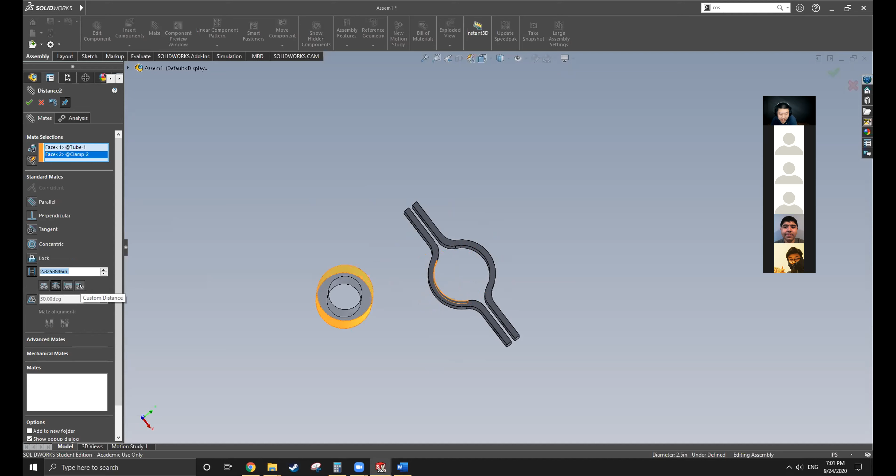there's a distance. And distance, you can see center to center, or tangent to tangent, or outer tangent to outer tangent, and one outer, one inner, stuff like that. So if you make this 0, that's the same story as concentric, right? But I just want to show you guys, if you're dealing with two circular objects, this is also one option to use to define distance.

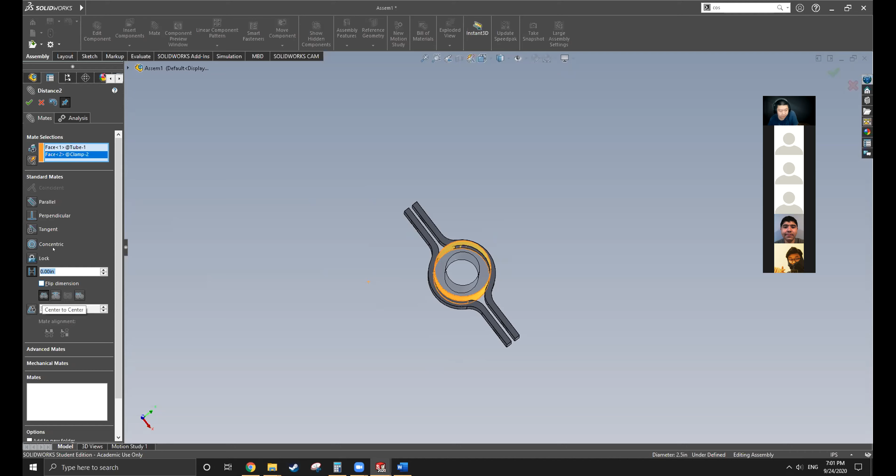All right, and also, okay, let's quit now, because I want to show you guys this, because we only made one constraint, which is the outer surface and the inner surface of the clamp. So this tube, you see, it can still move. It can move freely in this direction.

Like, if we say this is the Z direction, it moves freely in the Z direction, and it can rotate with respect to the Z direction. You guys see that? And is this what we wanted? Probably not, because we want to apply a lot of friction on this pipe, right?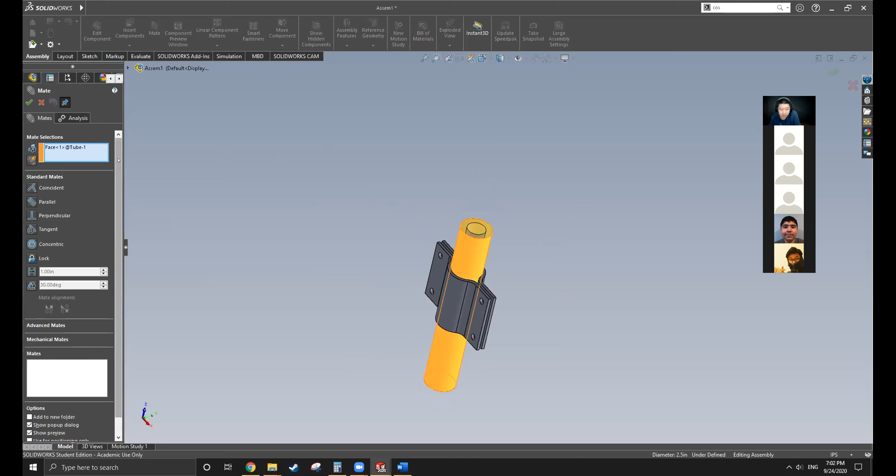So that means this pipe definitely should not move freely up and down. Let's do this surface, and the top surface was clamped, to have a distance of 5. The 5 is just what I made up, because it seems like it's in the center, but not exactly. So this distance applied, and let's move this. It can no longer move up and down, but it can still rotate.

And is this okay? It's definitely okay, even though we're applying a whole lot of friction, but this part can still rotate by exerting enough force, right? Or enough torque, sorry, enough torque.

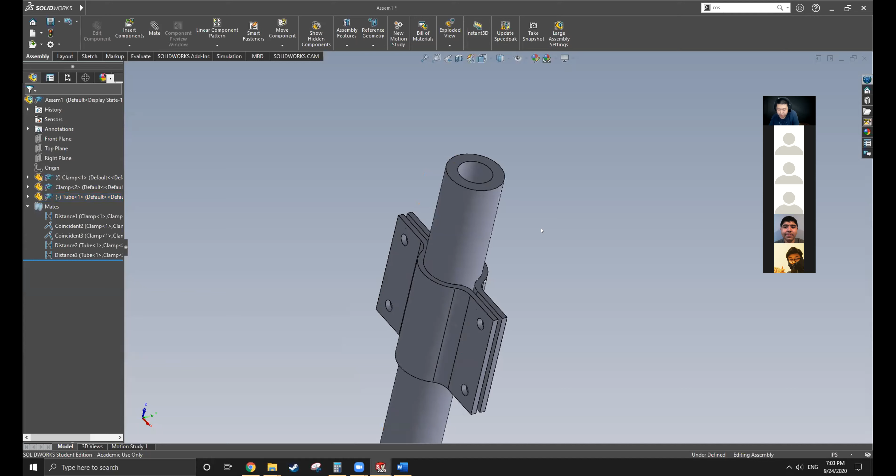So when you model your assembly and you want this to be ready to be analyzed, think about your constraints, because you're constraining certain degrees of freedom, and you must make it as real as you can.

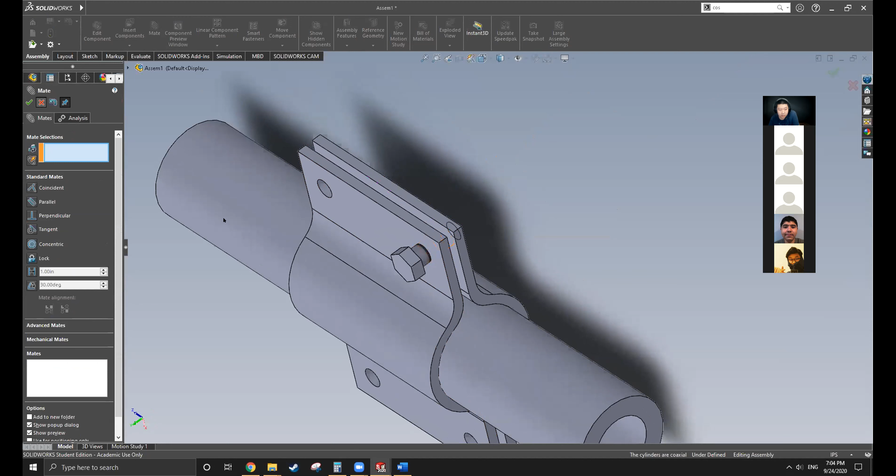All right, so the tube is done. Let's insert bolting, the cap screw. So cap screw is easy. The body of the cap screw, let's do mate. Body of the cap screw going to the hole, right? So it goes inside the hole. Let's click OK first, and you can see the bolting can go through the hole.

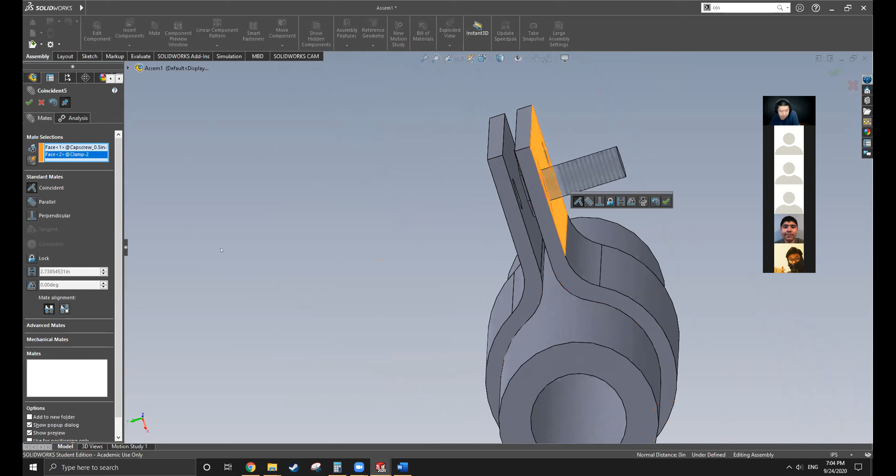And let's make this side of the surface touching this side of the surface. Now you see the bolting is in a weird position because of its direction. Let's flip this, and it's reversed. Ignore this, this is not important. So click OK. So now you can see this bolt can rotate, but can't stick out anymore.

And insert the nut, and make the nut with the same method as the bolt. All right, and this nut can rotate freely and can't be taken out because the surfaces touching is one of the constraints.

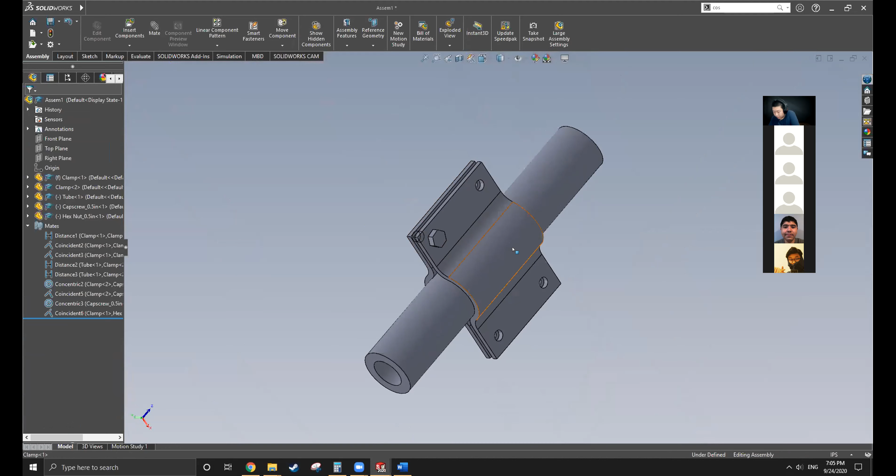Okay, so we have connected one hole, and let's do the rest of three. You can follow the exact steps I just showed you, same as making the hole. There is a linear pattern as well. Where is it? Oh, right here.

Linear component pattern right next to mate and component preview window. Click on this because we want to save some steps. I didn't select any components beforehand, so this box, components to pattern, is empty. So let's select the components we want to pattern first. Two components are selected, 2 clicks, you don't need to hold anything.

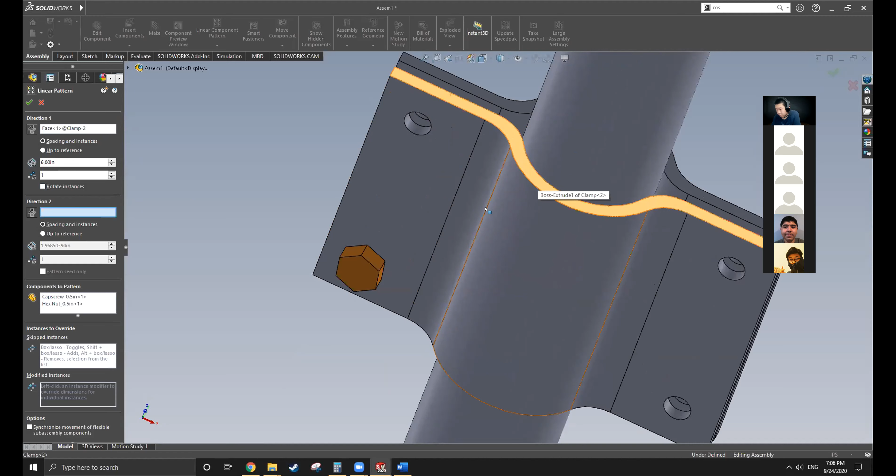First direction, let's go east and west. And this is 6, even though it should be... okay, my bad, it should be 6. Look at this arrow, it's pointing upward because I didn't select the edge, I selected the surface. This surface is going up and down, north and south. You can see the difference between selecting the surface and the edge.

So let's keep it this way, all right? Because this arrow is pointing upward, it's pretty good. So let's do 3.5. And this 2. So you see the first bolting connection showed up. The preview is pretty good.

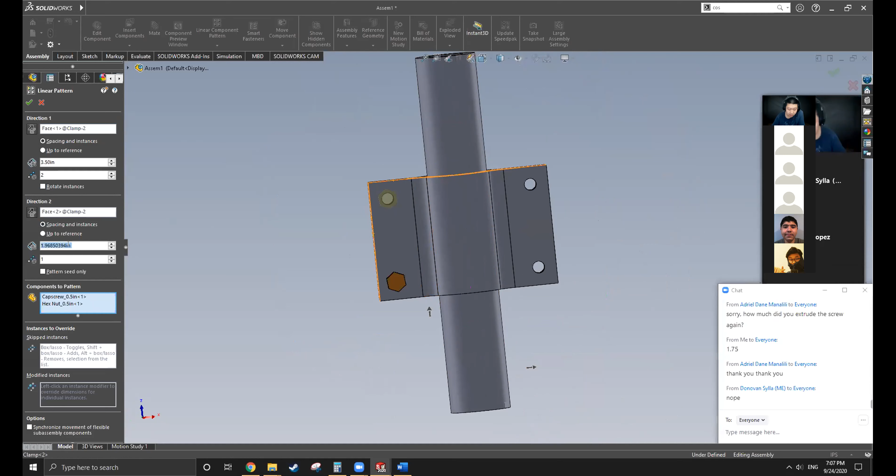And direction 2, let's select this surface. This surface is facing east and west, right? So select that, and the arrow here is pointing rightward, that's very good. The distance is 6 because this clamp is in a different dimension than what you're making. But somehow it doesn't go the direction we wanted. Doesn't matter, you see the preview showed up right here. Reverse it.

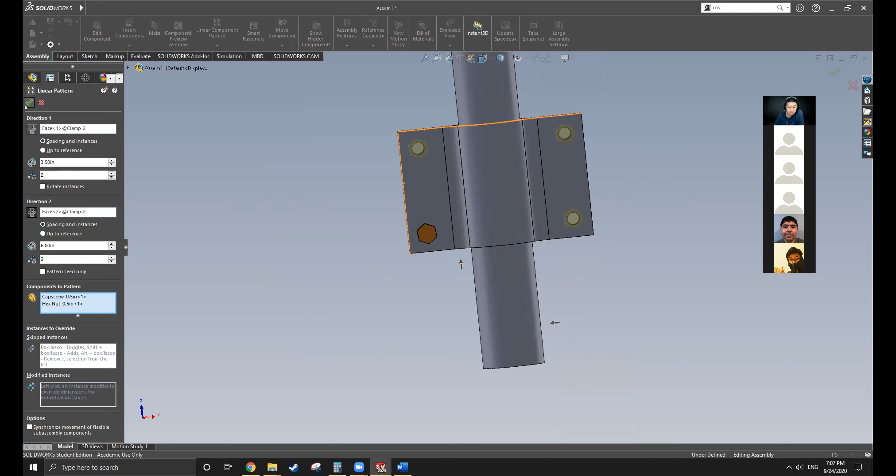Okay, so click OK. You have all 4 connections.

So everybody is good? Yeah, okay. Wow, you guys are too good. I almost can't believe it. Sure, I mean, yeah.

So pretty much this concludes our today's lecture. It just gave you a little taste in making assembly. I don't want to make this too hard. We're gonna go into a lot more details in later weeks.

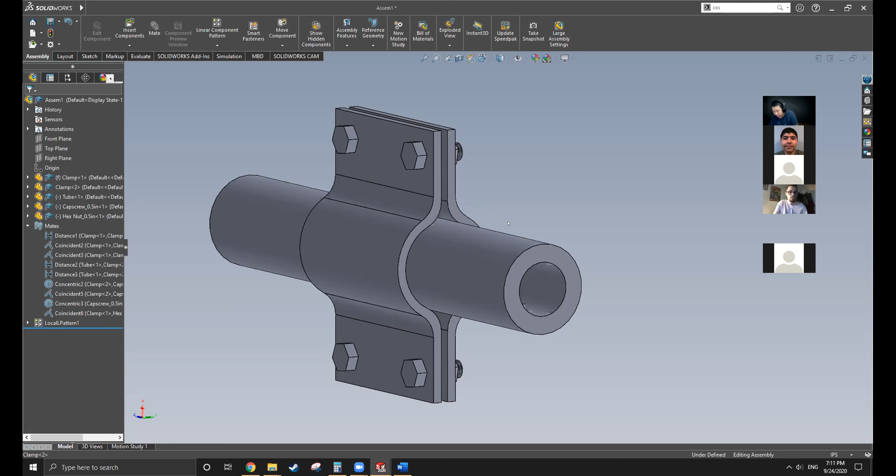Before I see your screen, are you getting a warning, or you just can't get to look at my desktop? You just can't get this one. So I can't get it, it says the SolidWorks ID. The serial number? Yeah, the serial number. So I'm running it, it's telling me to log in, so I guess if I log in, it's going to place the serial number in the window.

But every time I log in, it says login failed. So then I pressed forgot password, redid the password, and tried again, and it still says login fail. So then I went through... okay, hold on, let me ask you a question. I'm not here to blame you, but how many classes have you missed? Because I went over step by step how to download SolidWorks and obtain the serial number by at least the first two meetings.

Did you miss those two meetings completely? Yeah, I did. I joined almost on the last day I could join the class. So when was your last day? Is today your first day joining? No, I've been keeping up with the lectures and all of that, but September 3rd was my first day, around there. I kept up with all the design stuff, I pretty much kept up with it, but I'm just having a hard time with this right now.

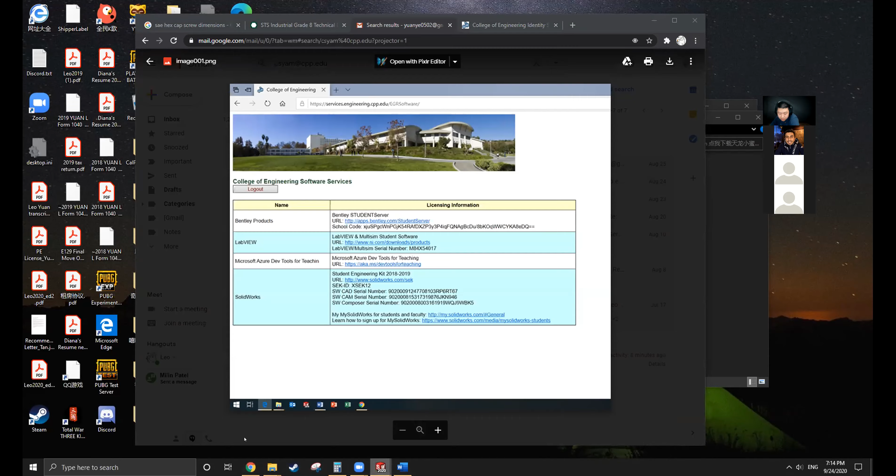So are you talking about not being able to reopen it after you save it? Yeah, yeah. I made like a specific folder. Go into your SolidWorks folder, there's the saves, and the default path is there, unless you changed your default. I did, I think I made a folder for the homeworks and labs, and that's where I'm saving the parts. Then you just save as and create a new location. Look at my screen, the save button, there's a dropdown, and you just click save as, even though you already saved this part, and you can redirect your path.

Oh okay, so I have to go to the SolidWorks folder. No, you don't have to go to the SolidWorks folder. If you already have the parts open, you just save as into a different location. Yeah, when I save it as the folder I made. And what's the problem? When I open it back, I have a problem opening the part back, it gives me a warning, it shows a 'file not found' error. Are you talking about a part or an assembly? A part. Okay, let me see.

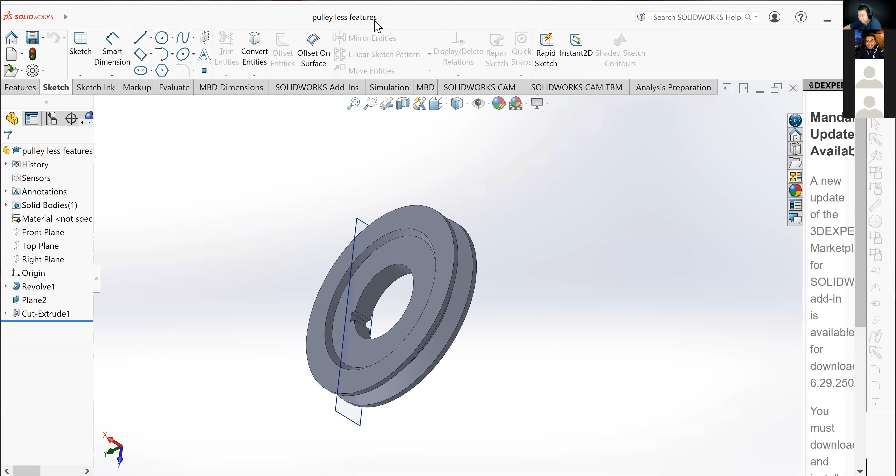Man, your computer is slower than mine. I know, are you using a laptop? Yeah. Wow, man, good luck with your project. Yeah, you see it? All right, thank you so much. Thank you. Yeah, no problem. Have a good night. You too. Thank you.